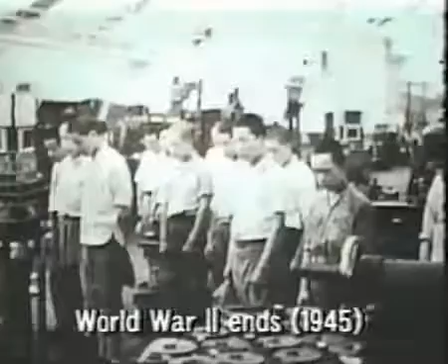After the war, Kiichiro passed on his dream to his cousin Eiji. He instructed Eiji to bring the company up to U.S. standards of technology within 3 years.

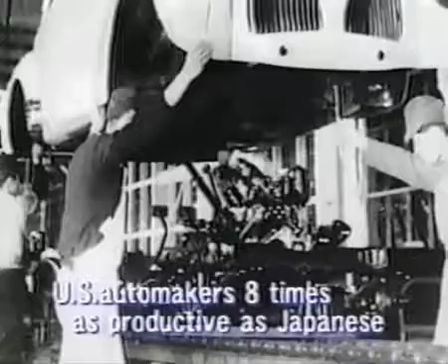That was a daunting task. U.S. productivity in automobile manufacturing was 8 times higher than Japan's, and Toyota was short of equipment and capital. So raising productivity was a pressing issue.

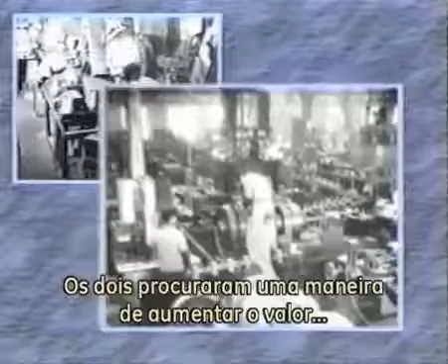Eiji assigned a machine shop manager by the name of Taiichi Ohno to develop a more efficient production system. The two men looked for ways to raise the value-added productivity of every worker. They did that by putting Sakichi's Jidoka concept to work throughout their operations.

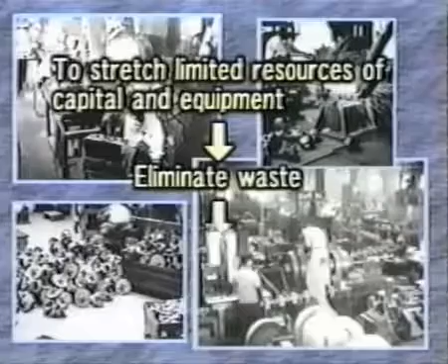They also looked for other ways to stretch their limited resources of equipment and capital. They did that by putting Kiichiro's just-in-time concept to work systematically.

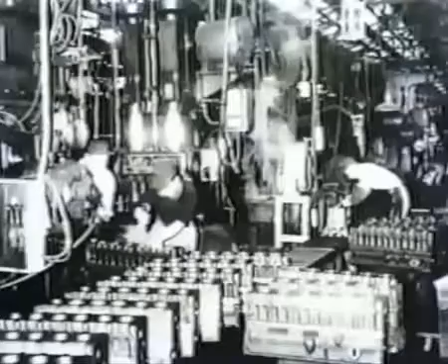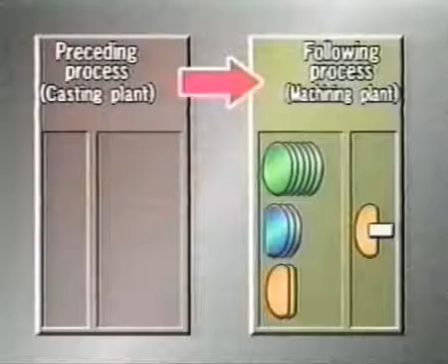Ohno took a cue from the U.S. supermarket. He made each process the customer for the preceding process. In traditional manufacturing, processes delivered parts to the following processes regardless of what was actually needed.

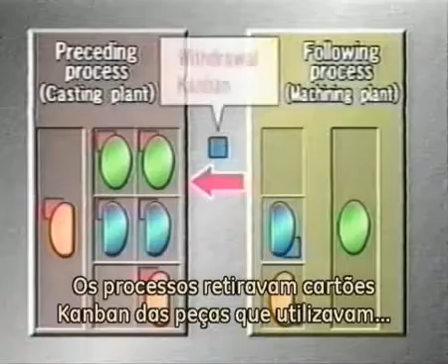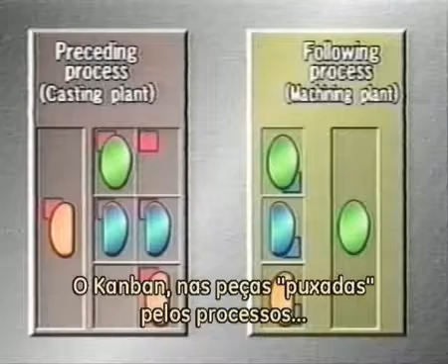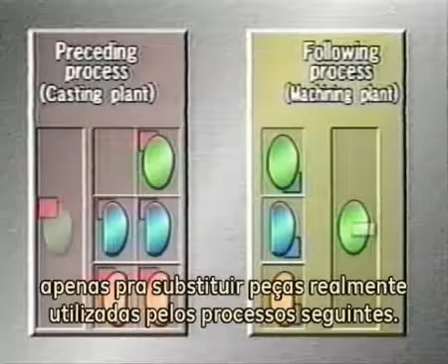Ohno devised a completely new kind of system. Processes used Kanban cards removed from parts they had consumed to withdraw parts from the preceding processes. Kanban on the parts arrayed by processes came off when the following processes withdrew the parts. They became instructions to make additional parts. The Kanban flow ensured that processes made parts only to replace parts actually consumed by the following processes.

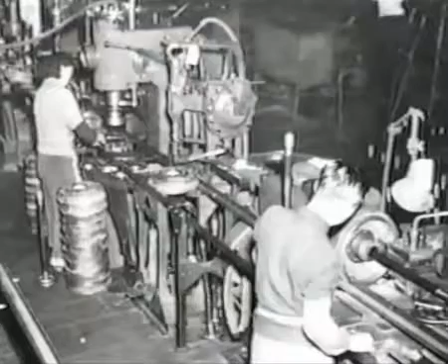Active cooperation by the people in the workplace would be essential to Ono's system. But at first, people were reluctant to give up their old ways of doing things. Ono took the initiative. He went into the workplace and taught people how to use his system. Eiji Toyota supported Ono enthusiastically in putting the new production system in place.

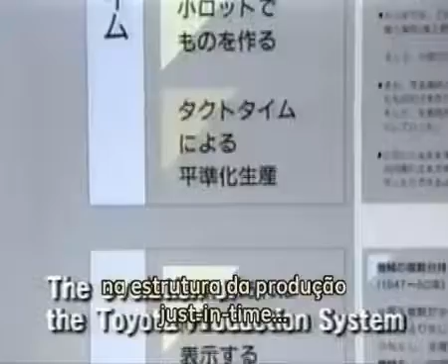A new production system gradually took shape on the foundation of just-in-time manufacturing and Jidoka intelligent automation. As the Toyota production system, it became a standard for manufacturing industries.

The Toyota production system gained global attention after the oil crisis of 1973. Toyota recovered more quickly than other automakers from the crisis, and its production system received much of the credit for that resilience.

General Motors Corporation approached Toyota about setting up a joint venture to make small cars in the United States. The two companies set up New United Motor Manufacturing Incorporated in California in 1984.

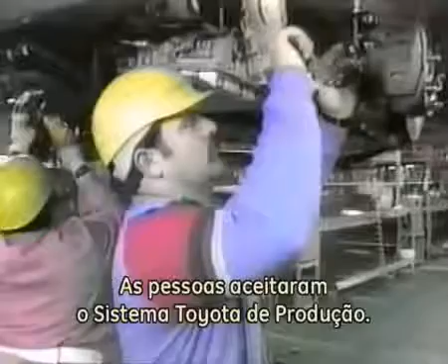Differences in language and culture presented big challenges, but the spirit of making things well knows no borders. People accepted the Toyota production system, and the Toyota-GM joint venture became the highest-ranked automobile plant in the United States for quality. It became a symbol of successful industrial cooperation between Japan and the United States.

A book published by the Massachusetts Institute of Technology hailed the Toyota production system as the machine that changed the world.

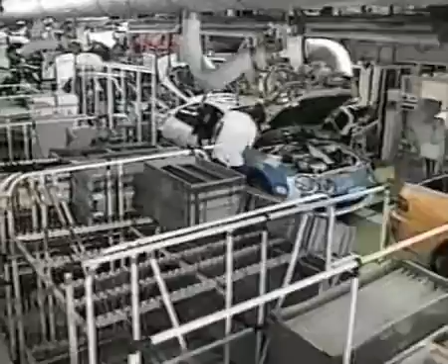Today, the Toyota production system has gained a worldwide following. Let's see how the system now operates in the world's most modern automobile plants.

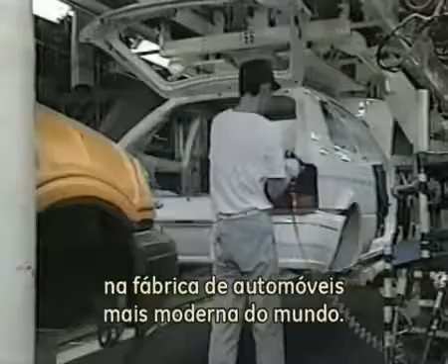The trucks that deliver parts to the plants carry a variety of items in each load. That allows each truck to travel fully loaded, which minimizes trips and thus reduces traffic congestion.

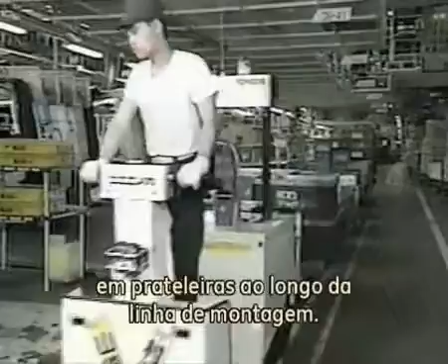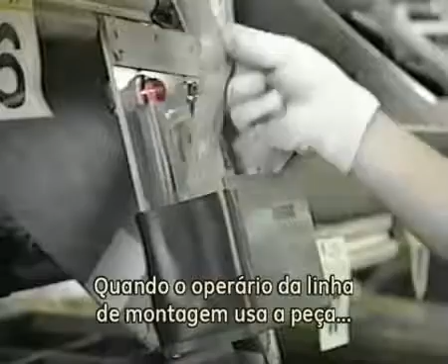Forklifts carry the parts unloaded from the delivery trucks to racks alongside the assembly lines. When people on the assembly line use the parts, they remove the attached Kanban cards.

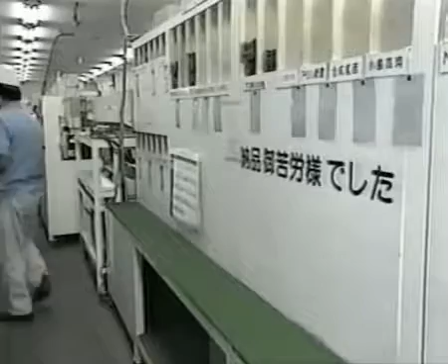The Kanban get picked up regularly and sorted. The delivery truck drivers pick up the Kanban for their company or companies before leaving. Back at the supplier's plants, the Kanban become orders for withdrawing additional parts.

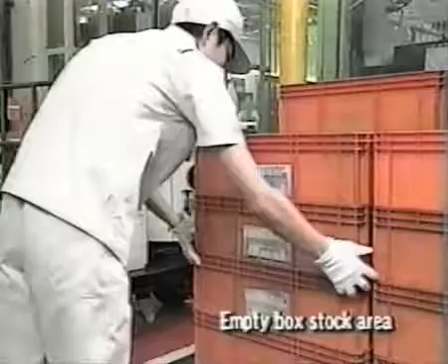Sorting arranges the Kanban according to area in the plant. Shipping personnel exchange the Kanban and empty boxes for full boxes.

The production processes in the plant make additional parts only to replace parts that have been withdrawn. That prevents the wasteful buildup of inventories.

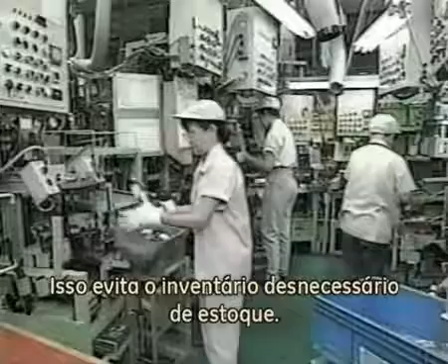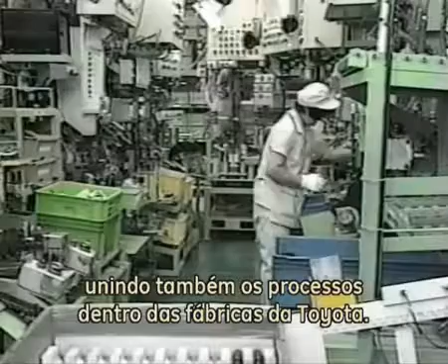When the shipping personnel have gathered a full truckload of parts, a truck carries the parts to the vehicle plant. Kanban thus link Toyota plants with suppliers' plants, as well as linking the processes inside the Toyota plants. Just-in-time manufacturing minimizes inventories, eliminates waste, and maximizes productivity at all the plants that participate in the Toyota production system.

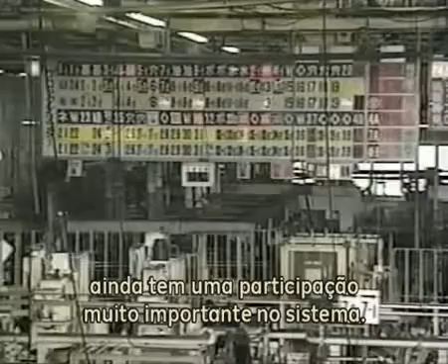Jidoka Intelligent Automation also continues to play a big role in the system. On automated machining lines, numbered lamps light up to call attention immediately to any problems detected by sensors.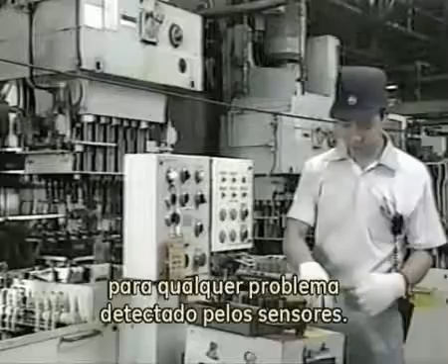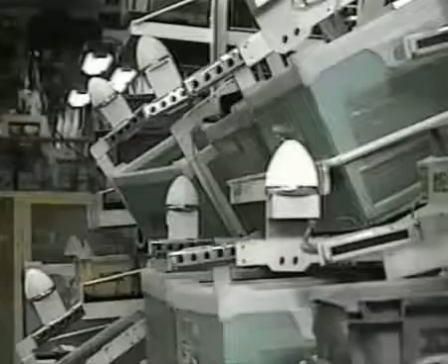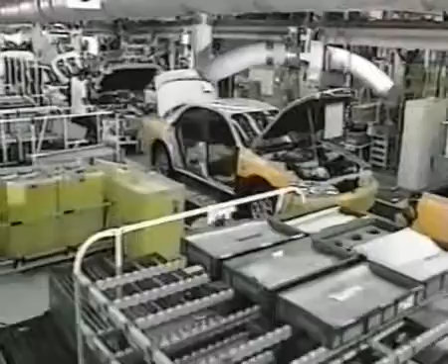On assembly lines, the employees themselves have devised countless Jidoka measures to prevent defective work. So Sakichi's concept continues to prevent waste. The idea is to build quality assurance into every process, and it works.

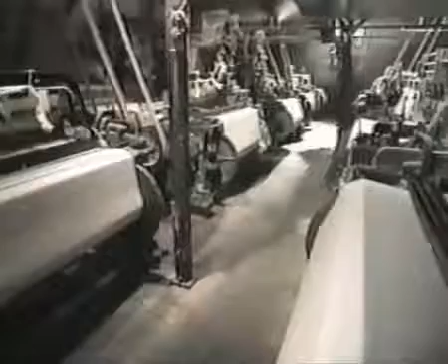The foundation for the Toyota production system has been established by Sakichi's Jidoka Intelligent Automation and his son Kiichiro's just-in-time manufacturing. Taiichi Ohno and others put those concepts to work systematically with the strong support of Eiji Toyota and his passion for manufacturing.

The Toyota production system continues to evolve in response to changing needs and circumstances, but the fundamental concepts are eternal, including Toyota's commitment to continuing improvement in every phase of products and operations. Those concepts underlie a lasting contribution to enhancing the quality of life for people everywhere.